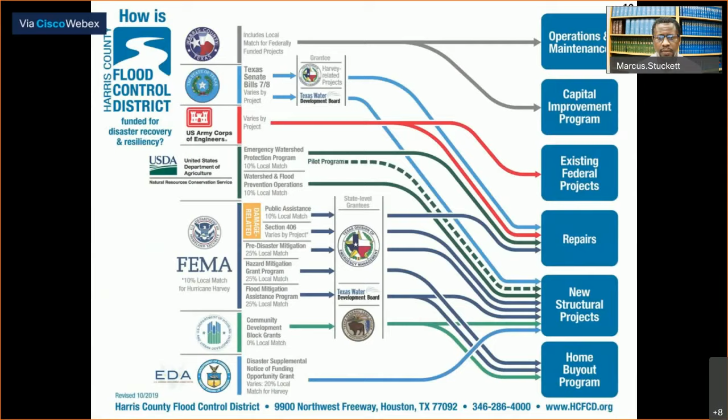We will now move into the portion of the program that is specifically about the Greens Bayou watershed and phase 2 of the Lauder Stormwater Detention Basin project.

The goal of the Greens Bayou Mid-Reach Channel Conveyance Improvement Project is to provide flood reduction to the area. Based on the existing channel right-of-way and development in the area, the project will contain the 10% annual exceedance probability, or 10-year floodplain, within its banks. Though we typically talk about flood reductions within the 1% annual exceedance probability, or 100-year floodplain, this area is densely populated and developed, which limits the channel improvements to a 10-year level of service. Increasing the capacity of Greens Bayou to achieve a greater level of service would require extensive right-of-way acquisition on both sides of the channel, as well as additional compliance with environmental regulations.

Both of these are cost prohibitive. Therefore, we need to rely on the stormwater detention basin to reduce flooding within the project area.

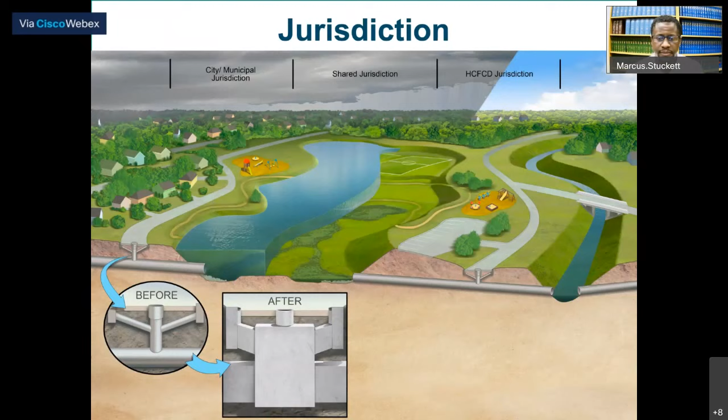Thank you so much for that, Marcus. Our next question is for Tawana: how do stormwater detention basins work, and will this hold water all of the time?

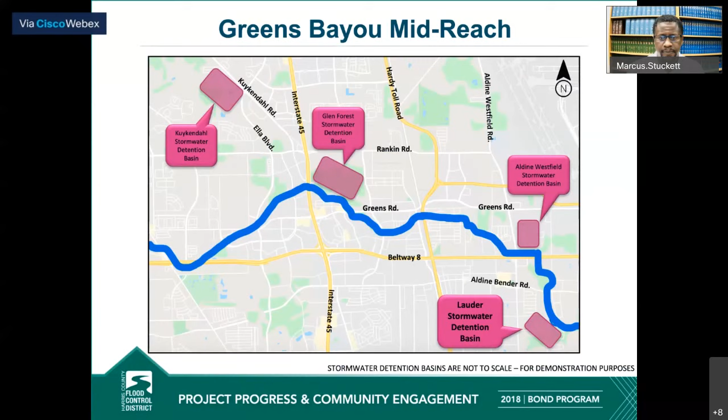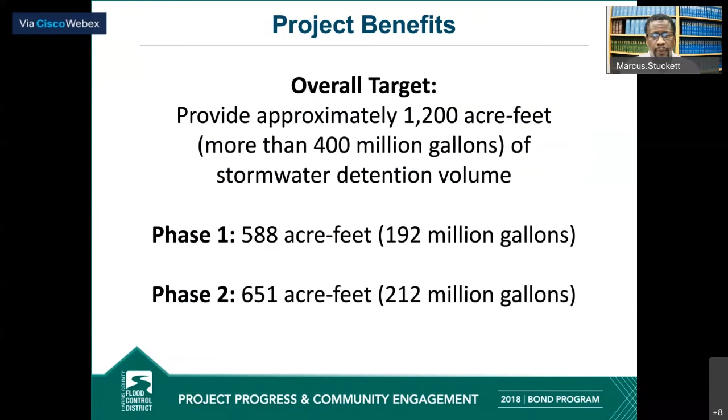Just for comparison, to give you an idea of what an acre foot is - it's the width of a football field, going from goal line to goal line, approximately a foot deep, and that equates to about 326,000 gallons of water. For both phases of the Lauder Stormwater Detention Basin, we expect that to carry almost 1,200 football fields, 1 foot deep.

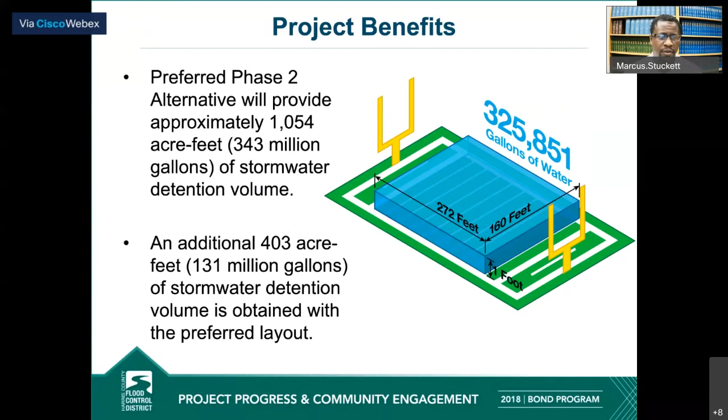We evaluated several alternatives for the capacity and recommended the capacity based on the alternatives shown here. The maintenance berms around it are 50 feet, with 30 feet that we allow for maintenance purposes and our backslope swales, but also the additional 20 feet that will allow recreational opportunities such as hike and bike trails or some of the amenities.

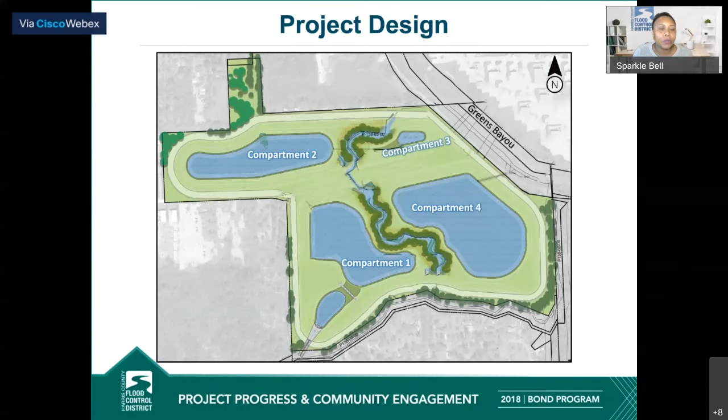Okay, thank you for that. Now we have a question regarding the timeline. So if we could get that slide back up that has the timeline. Marcus, I'll pose this question to you: when will phase 1 be complete?

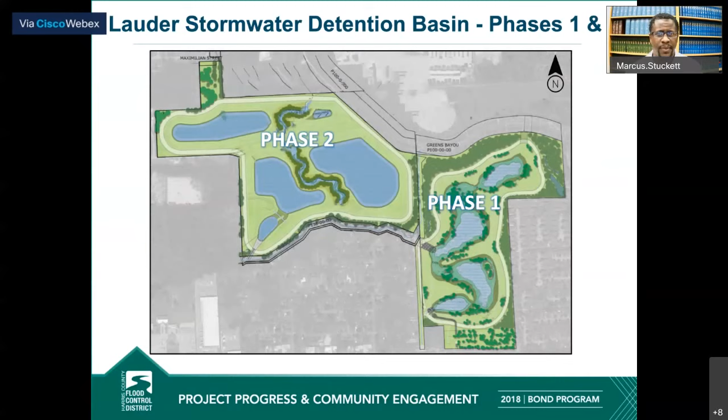That's actually a good question, and it's not one that I have an answer for right now, but it's definitely some data that we can look up. It's largely going to depend on where you are in the county and where these different storm events happen. It's not that the entire county sees that 1% event.

There have been scenarios where we've had large events in the western portion of the county, and things are haywire - watershed-wide flooding - and you see nothing on the southeast side of the county. So while I don't have that answer, that's something I can figure out based on the data that we gather, and that's one we can definitely follow back on for whoever asked that question.

Yes, we will. We definitely do log all of these comments, and any comments that are not responded to or not addressed during tonight's Q&A will receive a response from the district, so we will follow up with you.

This next question is for Dr. Sue: How are you coordinating with other local entities, the precinct, or other entities with projects in the area?

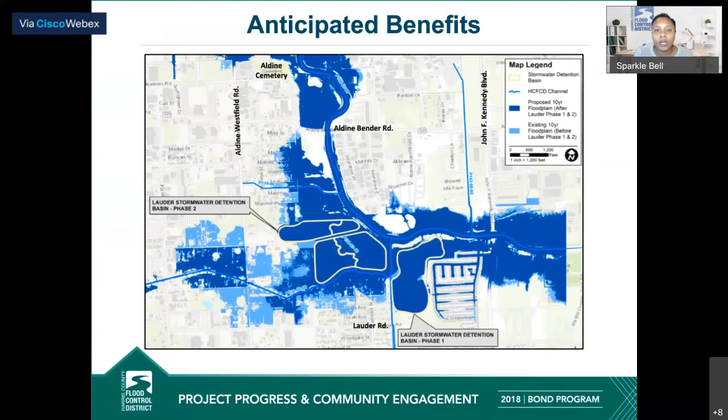Flood control actually has a precinct 2 coordinator, Jeremy - I believe he's on the call as well - and he's our liaison between the flood control project team and precinct 2. We have regular communication with precinct 2 regarding the development and design of the project.

With other entities, I think this public engagement meeting is one way we communicate with the public. We also have other presentations to Greens Bayou coalitions and other entities such as Aldine Independent School District. We've had several meetings with them to coordinate the construction of the basins, which resulted in the requirement for the contractor to have no truck traffic on Lauder Road during school drop-off and pickup hours. So we've done a lot of coordination with all the entities we can talk to.

Thank you for that, Dr. Sue. Imelda, I'd like for you to give a reminder for our Spanish-speaking participants.

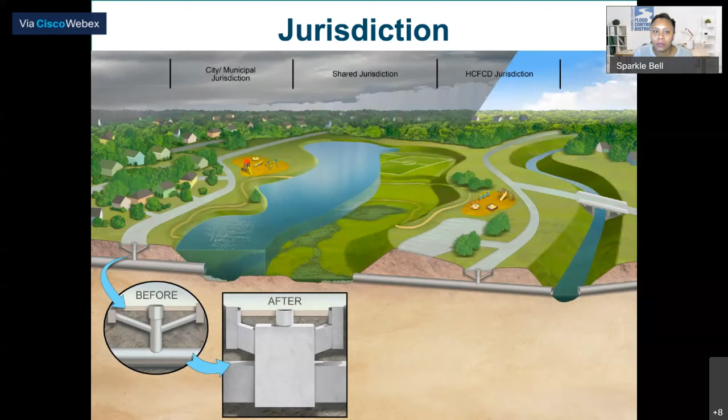Thank you so much. Okay, our last question that we'll take will be for Dr. Sue: When will this project be far enough along to provide the benefits to the area?

Very good question. If you've noticed, phase 1 basin was actually partially excavated last year - we call that the intermediate excavation project. That was a response of flood control to Hurricane Harvey. At the time we were waiting on the individual permit to be granted from Harris County and from the U.S. Army Corps of Engineers, so we excavated a basin and connected it to the P13800 channel, which provided some relief immediately after that. Currently, phase 1 is under construction.

So the more the contractor digs out volume from phase 1 basins, the detention capacity can increase over time as construction goes along. For phase 2, until excavation started in 2022, it won't provide any benefit, but as soon as the contractor started excavating the basins, it will be similar to phase 1 - as long as capacity has been excavated, it will provide benefit to the residents.